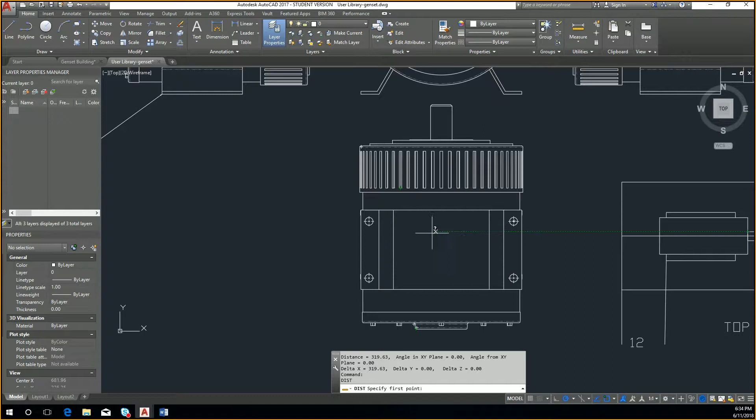So bringing in the models, sometimes they're unitless, so there's no definite way to know what units they are. This one happened to have it where it showed it was in millimeters, but you don't always have that available. So the quick check was you have to use a little bit of common sense, a little bit of logic. Check the distance. Is that 319 inches across, or is that 319 millimeters? So came to the conclusion that's in millimeters.

And going from there, created blocks. So I created a write block of just this because I need to know my hole distances. And then I needed my final view, which was going to be this one for the front view and this one for the top view.

So again, the command was W block. That lets you write a new block. Choose the folder I'm going to save this in. Where is it? There we go. So I'm going to just name this something simple. Genset top. Genset top view.

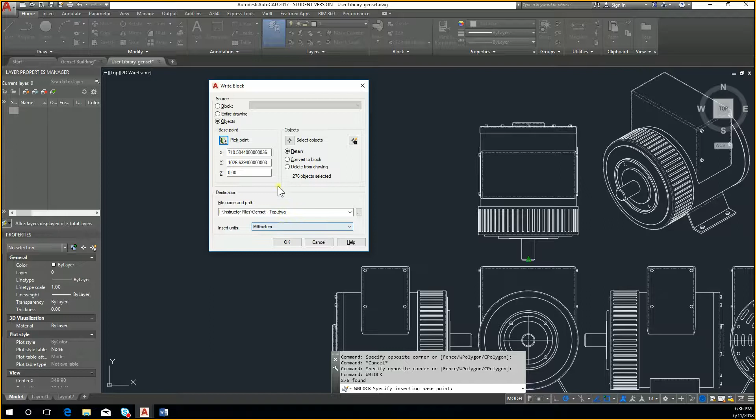And then previously I had started off with a couple different views already, so I have my bottom, my front, and my top. So I've already done that from last time. So I will jump back over to here. So as you see, I've already gone ahead and done a few of it, but I can just go back to show you what I had done before.

So bringing in the bottom, there's my bottom.

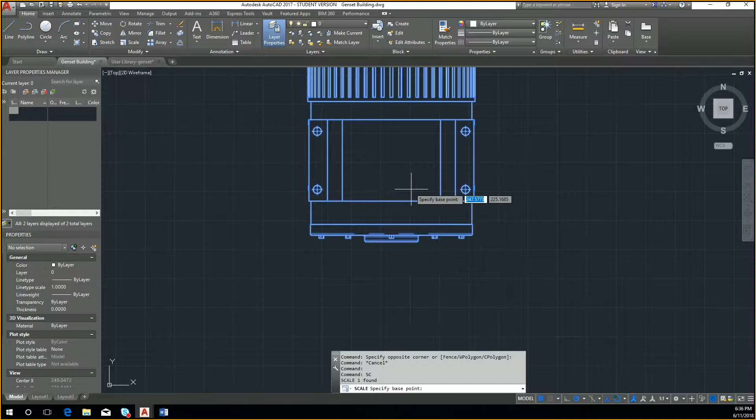This was something that I had already scaled. Had this not been scaled, it would be a lot larger, but the way to scale from millimeters to inches is using that 25.4 factor. So 1 divided by 25.4 gives me that scale factor I need to put in. I would punch that in after choosing a base point and scale it down. So I've already done that. This is now in an inch size.

So I can continue on with my project. From there, I'd mentioned we want to be mounting this onto a 3 foot by 6 foot by 3 foot tall table using 2 by 2 by quarter HSS around at the corners and on the horizontal plane of the frame.

So this is going to be 36. Sorry, other way around. This is going to be 72, 36, and there's my table. So I saw some of you guys taking measurements.

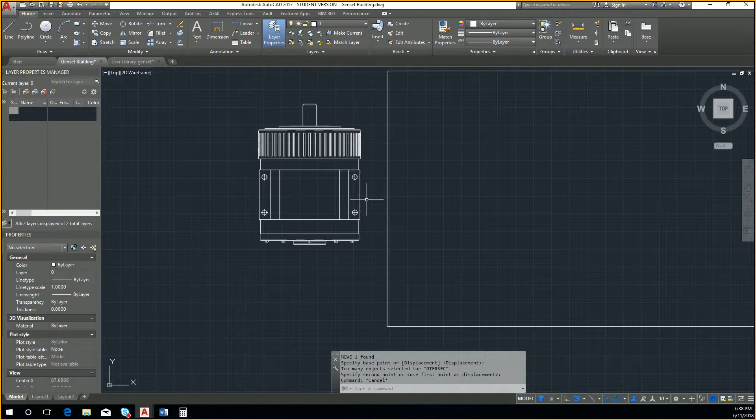That's one way to do this, to figure out your hole pattern. The other way you can actually do this is, since you already have the model, you don't have to do additional work. You can throw down a centerline for reference. Rotate this object so I have it in line like so.

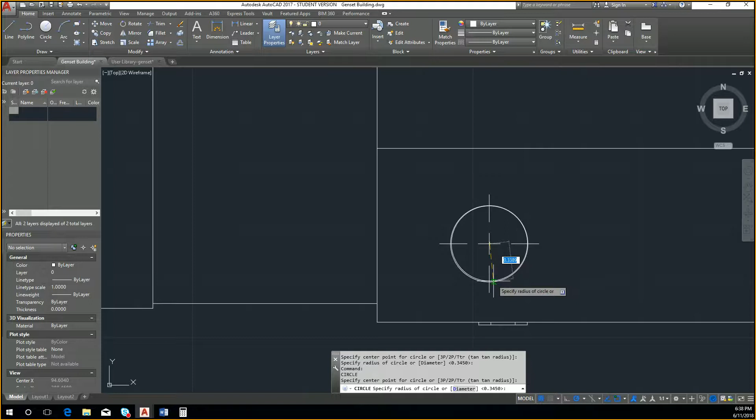And I'd said I'd want to put this 12 inches from the back, so there's my mount plate, 12 inches from the back of the table. I'm going to move this from my reference point now, 12 inches. That's done. I can then draw in my hole pattern, matching circle for circle, like so.

So there's the plate of my table. So isn't that a little bit easier than taking the measurements and trying to locate everything? Try to use the model to your advantage, because you can't get any more accurate than that. In real life, this would be something they call a match drill, essentially, by having your object directly onto what you need to be mounting onto. It's essentially perfect, right? There's not much closer you can get to this.

So once I have that, that's my top of my table. As you can see, did that previously. Just going to delete that one. And then I projected a view to show the front view of it.

The reason I did this is because later on, we're going to want to show thickness of this table. The only way to show thickness is you have to have multiple views so you can actually dimension it properly. And I did actually show this where my hole locations were. As you can see, they line right up with the holes above on a hidden line layer.

So that's the top of my table. I then proceeded to make the rest of my table. So now that I had this made, I could copy that over and put that into view of this. The reason why I have multiples now, because as I mentioned, you need to have multiple views of things dependent on what kind of component they are.

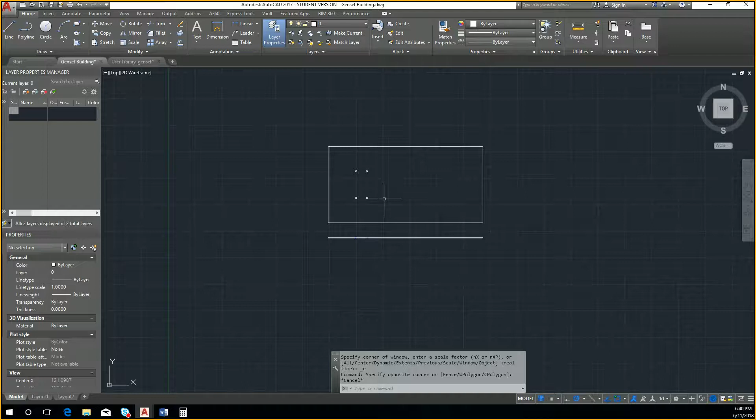So if you were to truly build this, this is a standalone piece. This is something you would actually send out to a shop to have that plate cut down to the right size, and they would actually mark those holes and drill them out, either by a machine or put onto a cutting surface. So a laser, a water jet, a plasma table, something that would actually cut those holes out for you. So multiple ways of doing it.

This is more the assembly side of things. So to actually get to the legs though, we have to actually build up that frame. So here's my frame.

So to figure out my height, I went back and checked, 3 foot tall. Overall height needs to be 36 inches minus the height of this HSS, so 2 inches there, leaving me 34 inches on the bottom. If you interpret this as taking the full height including the 1/4 inch, which is what I did, then this is actually just 35 3/4.

So to do this was literally just drawing out my lines for my vertical legs there, and across, and all the lines inside are just hidden lines of the internal hollow tube.

Finishing off my corners on a top view, I've mitered each of my corners. That's just a 45-degree line there, so in case we forgot how to do polar, I just did a 45. You can extend it past, you don't have to actually figure out the true distance of that.

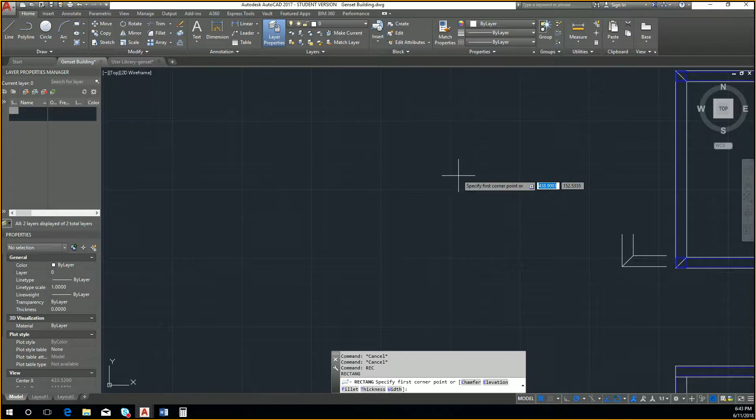Two by 2. There we go.

From there, we don't have perfect dimensions of the outside radius, but it's typically about a 1/4 inch. And then the wall thickness was 1/4 inch, so 0.25. Fillet again. Radius is about half, so 0.125.

Switch over my layer, hidden, and then that's my top-down view.

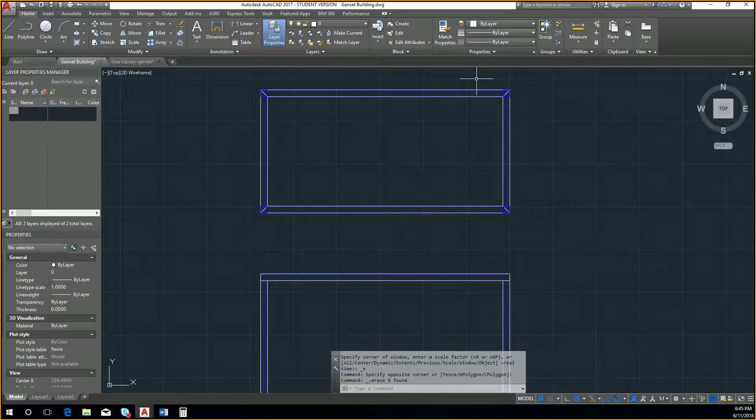So this is its own standalone drawing as well. I can add one more view if I want for the side view, like so.

Trim that back, and there we go. This is my side view.

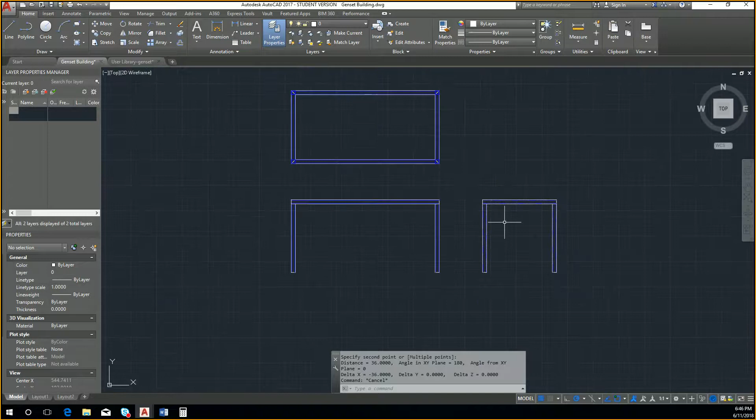So those are all the views you would need to build this specific table. Depending if you're required to do it, some companies will actually ask you to do an individual part drawing for each of the unique pieces of HSS.

So again, I would just copy out just that piece that I need, move that over, change that layer. And there you go, that would be my detail drawing of this piece here, just because these have miters on them, and then you'd repeat it for this piece here for your shorter lengths. And we'll get to showing that on the annotations a little bit later.

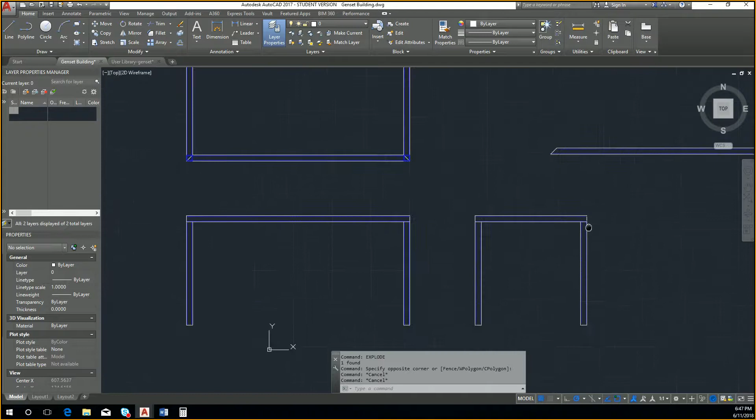So there's my table, here's my table fully assembled. As you notice, I've chosen to leave out hidden lines on my assembly of the table. That's just for clarity. There's times when you're going to need to choose whether to show all the detail, or certain times you can choose to actually hide away some detail just for clarity's sake, because the detail of the thickness of the tubes and everything else was already done on this component drawing, meaning your full assembly can be left a little cleaner.

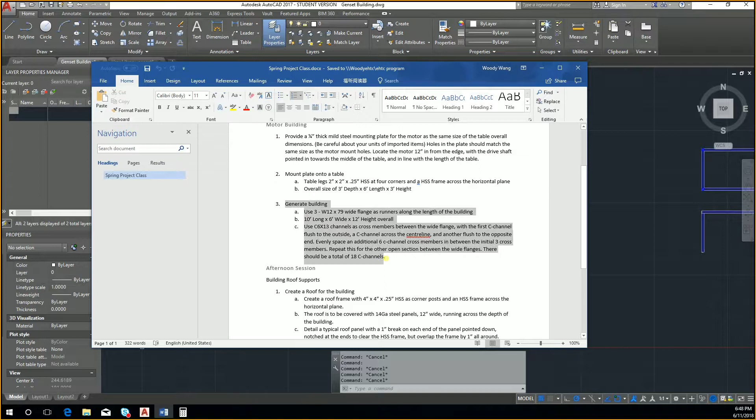All right, and moving on from that, that's my table. So, gonna jump onto generating the building itself. So we're gonna look for W12 by 79 wide flanges.

So W12 by 79 right here. As I mentioned last time, if you ever need to, there's a nice handy tool called Snipping Tool in Windows. If you start that up, it will actually let you just go ahead and snip whatever you're looking at.

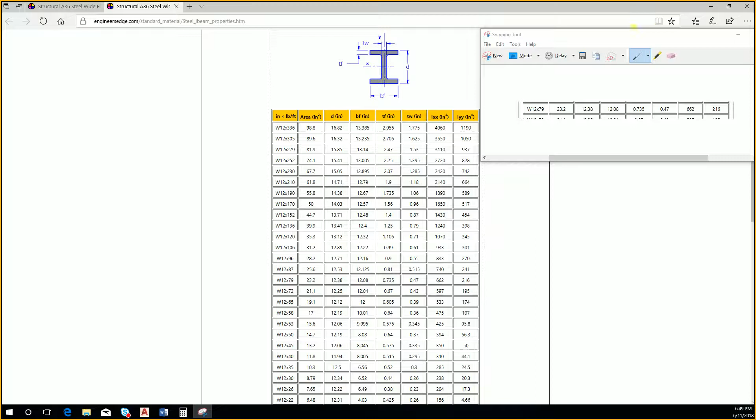And we'll go ahead and draw this up. So in case there was any confusion about how to read this, this is your steel callout, so this is the general name for this beam shape. After that, you follow through the rest of the columns. So area is not helpful for us right now, but the D is for our overall height, so 12.38.

So I can draw my vertical 12.38 construction line. After that, we're jumping over to our BF, which is our flange width here, 12.08.

Again, you can choose to do the math, or you can just punch everything in and let AutoCAD do it for you. And we've got TF, that's our thickness of the flanges here, 0.735.

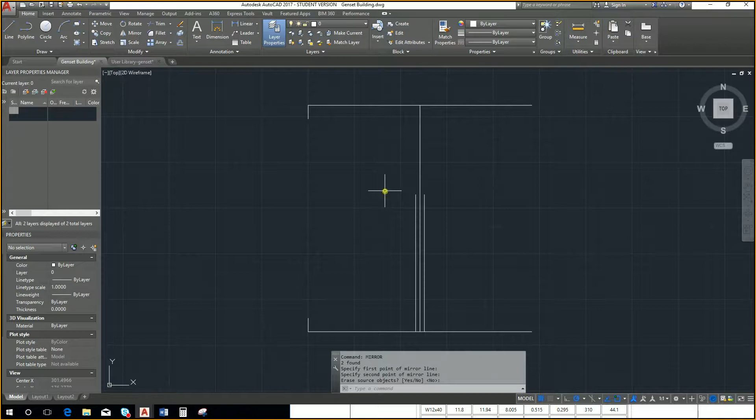I'm just going to mirror this right here. There's my midpoint. Like so. To my fillets.

Technically, let's do this now. Mirror all that. That's done. Actually, looks a little bit skinny. I'll make sure this is right.

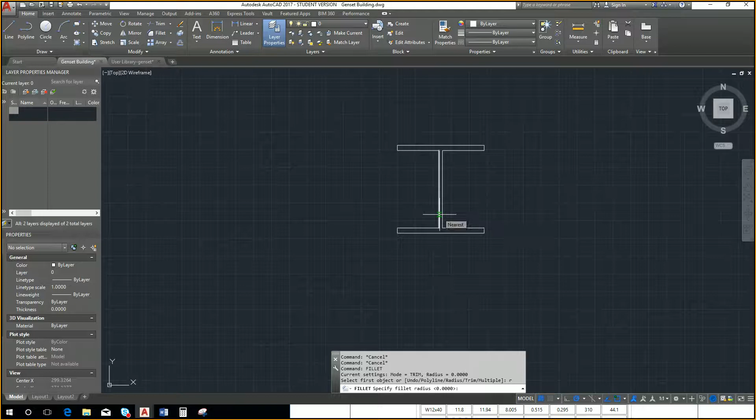Okay, that's good. And if you want to make it look a little bit cosmetically closer to what it should be, you can go ahead and radius those corners there.

And that's my wide flange. Can actually copy that and paste that as a block. That's not the most proper way to do it, but it'll work for now. You can actually create this as a proper write block if you are looking at building a library, but just for the exercise, just so we can go through this a little quicker, I'm just going to use that shortcut.

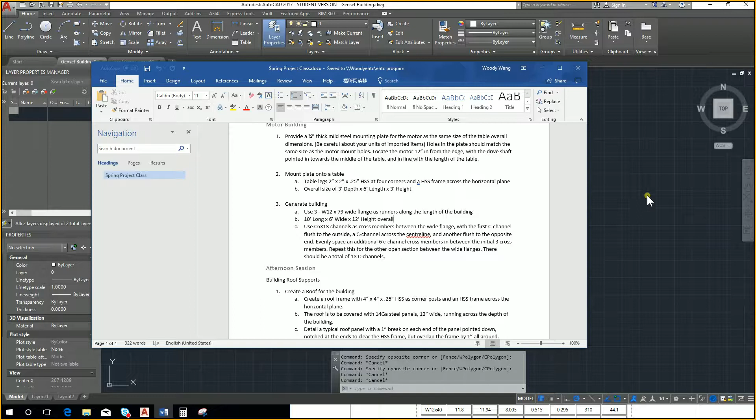So our building is 10 feet long, 6 feet wide, 12 foot high overall. So right now we're mainly just looking at the length and the width of our building. So 6 feet for width.

Construction line, 72 inches long. Gonna copy this object. I want that. Snap there. And I want one more based off the midpoint, like so. And there's my width of my building.

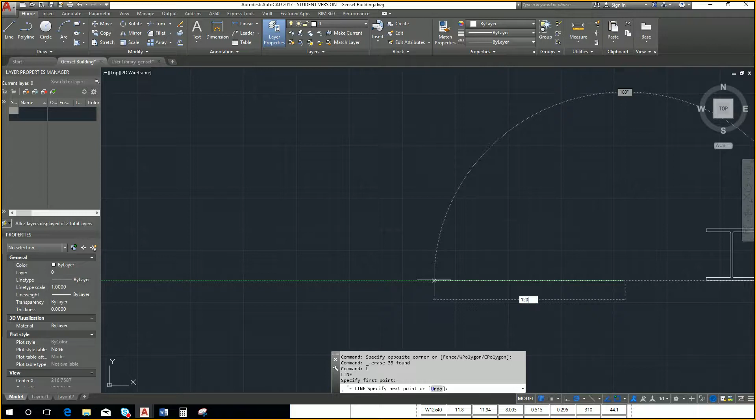All right, and then we're going to do a side profile of this. And notice I'm just using all the geometry already given to me. I'm not doing extra work.

There we go. So that's my side view. And we do need C channels, as I mentioned before.

Right here, we're going to look up C6 by 13. So C6 by 13. Right here, C6 by 13.

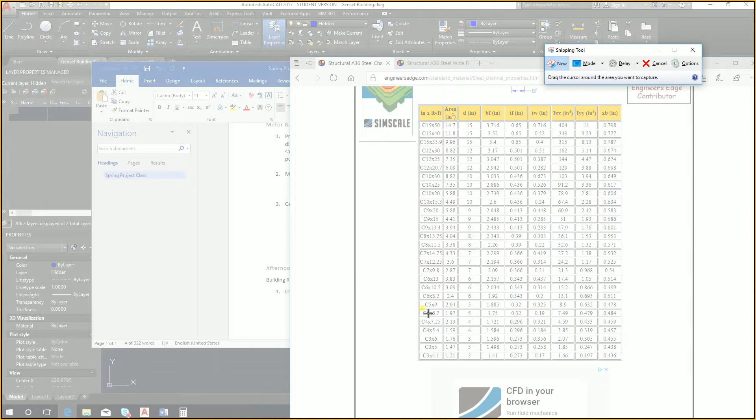So my overall height, my D, is going to be 6. Oops, wrong layer.

My BF is 2.157, right there in the bottom. So that's the base of the flange, right? So...

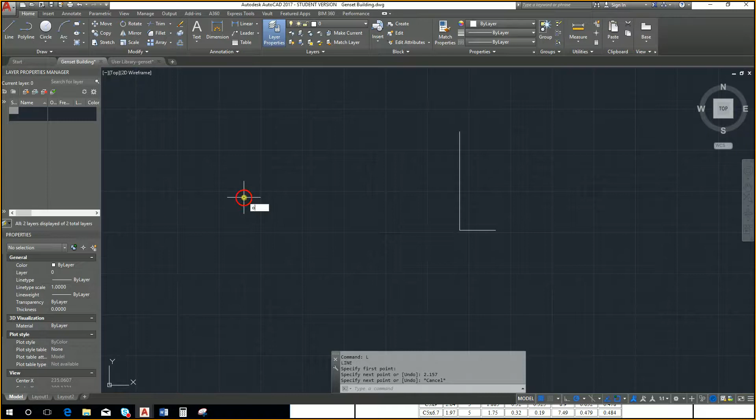My TF, my web thickness itself, is 0.343. And my T, oh sorry, I mixed it up. My TF is 0.343. That is the wrong piece. That should be this piece here.

There we go, my TW. My TW is 0.437. This is web thickness right here.

And that's everything I need.

So the thing that they don't truly show well is this curved out section here. The main thing is to get it looking fairly close. There are other sites that will actually show you that exact sizing, but just for our purposes, we don't need it that accurate.

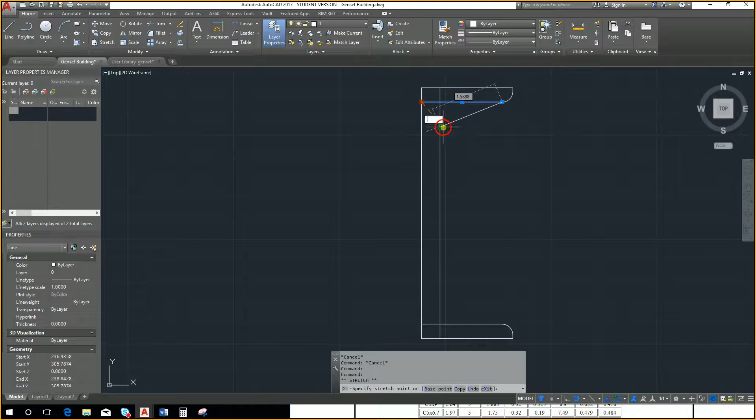So let's do a fillet. And we can make that 0.605. Oops.

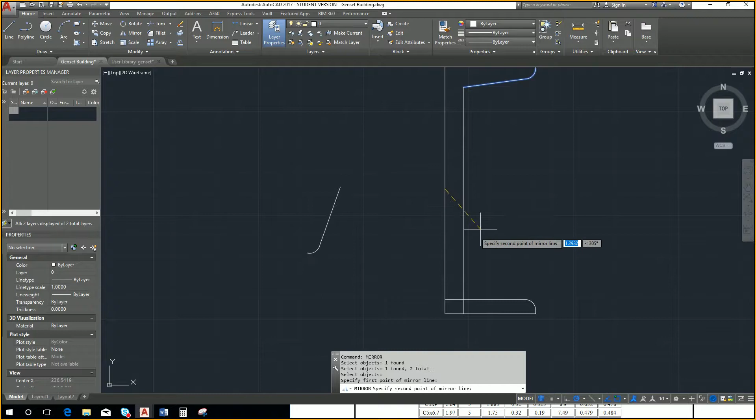Something like that. And there's my C channel, just like that.

So, just gonna use that shortcut for the block. Move this to the end, and as I mentioned here, we want the first one flush to the outside, one along the center line, and then the additional evenly spaced 6 on the one side.

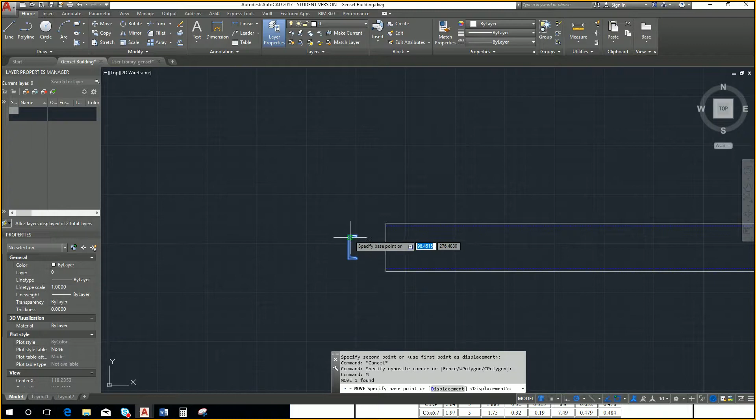So what that's going to look like is like so. It's actually hidden. One in the middle. One mirrored over there. And then this was where you had different options.

You can choose to either array, or you can use a lot of copy and finding midpoints between objects. So, just so you guys can see what the array one looks like, I'm going to array this object here.

I'm going to choose my path. It's going to be this path right here. And we're going to go with items. Oh, that's all right. Method. There we go. Measure.

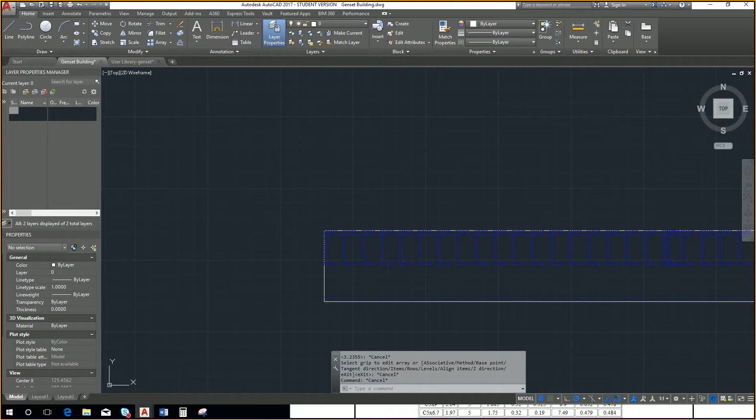So between those 2 points right here, it's my midpoint. So, copy that again.

Last one. So I've done all that. I can just go take these 3, mirror that again. Done. So that's how I would lay out the C channels.

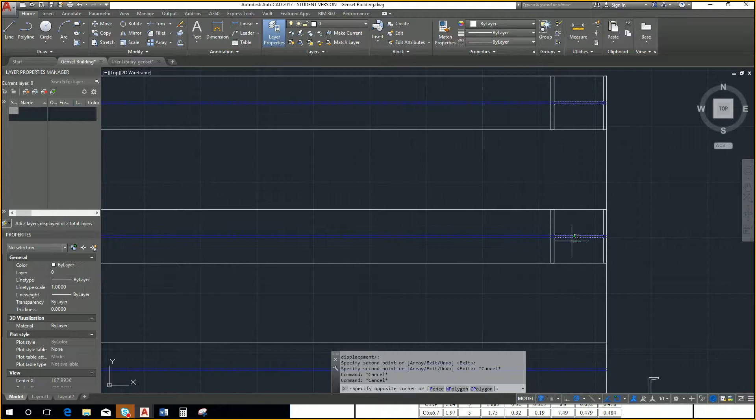And there's my top view. Copy this guy. Snap them down there so I can know. Actually, sorry, I should be copying all of them.

Do you guys notice the general trend though? I'm always trying to use the geometry I've already built and set up, so I'm not always having to measure things out or calculate things. Once I've already figured out one set of geometry, I'm trying to use that across my design as much as possible. So this method only works well if you're very careful and accurate with what you've laid out previously. You do have to be careful about that.

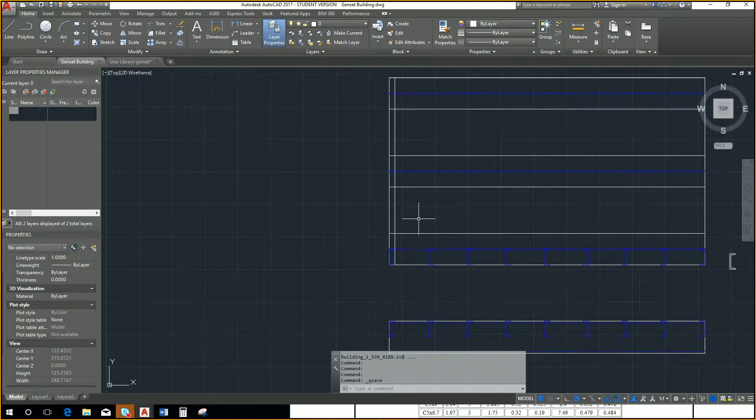So just do a copy now. I've got my distance set. Snap this to everything that should be visible. And one for the web if you want to be really accurate. Make that a hidden line.

Once you've done that once - actually I should take that back. Once I've done that once, I can go ahead and copy these to each one. I know those are a little bit backwards right now, but I'm going to fix that after.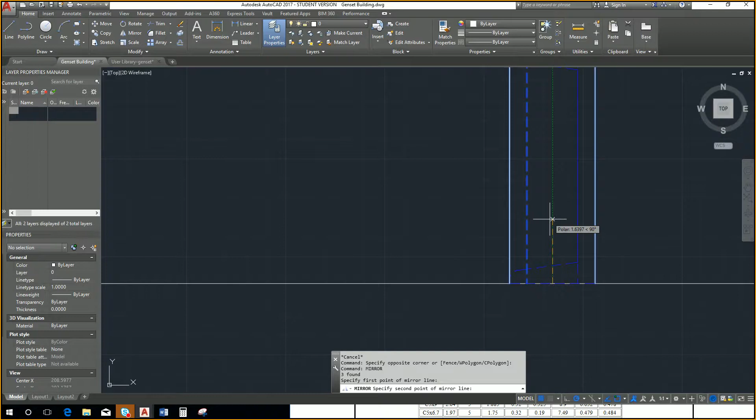My original reference C channels there. And then now, I think I mentioned it to some of you, but maybe you didn't all catch this - there's a break command. So you can either break these or you can trim them. I just want to show you how break works.

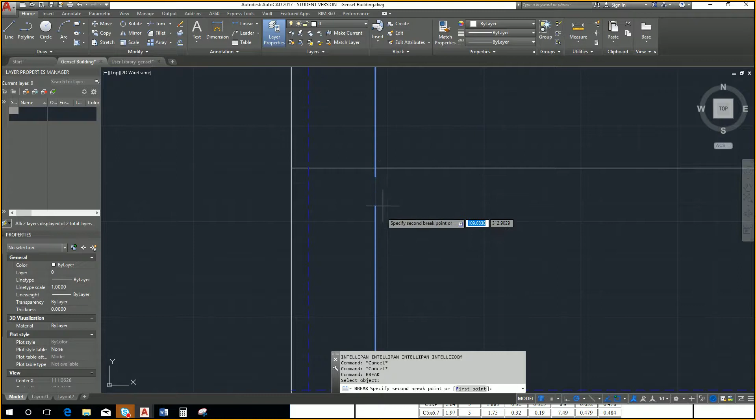Actually, I should do that over on this side here. So break - the first spot that you choose your line is the first part of your break point, as you can see. I want to break it on this side, and that's visible.

This is going to be broken there. So continue that on all the way through. Delete those.

Trim these back. And just in case you guys didn't know, trim command works where you can actually choose your trimming border and then use your multi-selection, so you can trim more lines at one shot.

So in this case, I can actually just use trim as well. Don't have to use break in that case. Where you would want to use break is in between here.

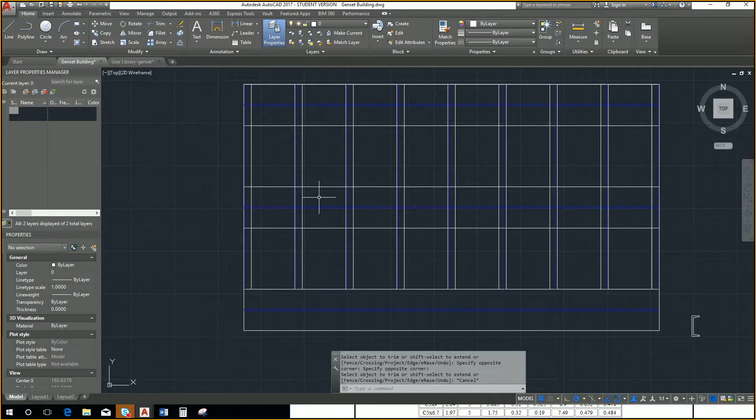Or, just to show you guys yet a different way to approach this, I can choose that line there to be my next trim point. Trim all these lines away.

And copy all of these from there to there. Oops, didn't get them all. Let's try that again.

Any questions so far? Does this make sense? Is this the way that you guys approached it, or did you guys do things a little differently? Do you guys like this method a little bit better?

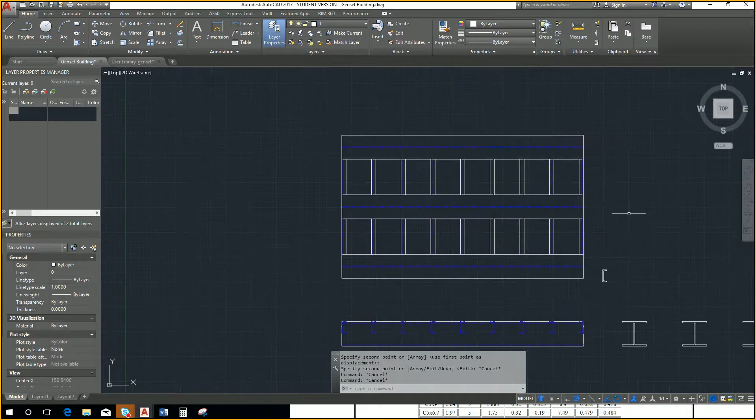So that's my top view done. So the one view that's missing, I need to finish up this one here.

So I know some of you guys were really confused about how to show your C channel, just because you weren't sure what's visible, what should be shown, and where.

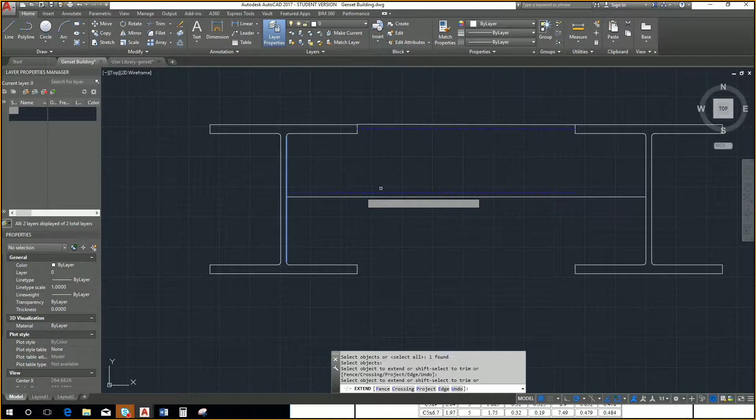All right, done that, copy that over.

And that part's done. So that would be one drawing I would leave alone, and then I would actually do a separate drawing over here with the finished plate. So this is gonna have, I believe I wrote down 1/4 inch plate. Where did I throw that down on?

Okay, maybe it was missing. There should have said 1/4 inch plate. Might delete it by accident. So 1/4 inch plate to top. Floor. So simple enough - 0.25.

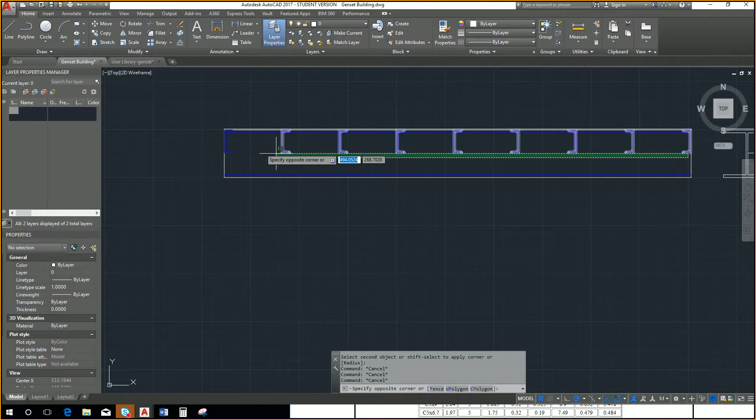So the other thing you can also do, is finish this off here. Yeah, actually a number of you guys got to the roof from what I remembered. So we'll just finish off this roof real quick here.

So 4x4 by 1/4 inch. My overall height is 6 feet - what are we looking at? Sorry, 12 feet. 12 feet overall height. So 144. So I'm just gonna grab another one of these frames, dump it over here.

The base, 144, just so that I have my height reference.

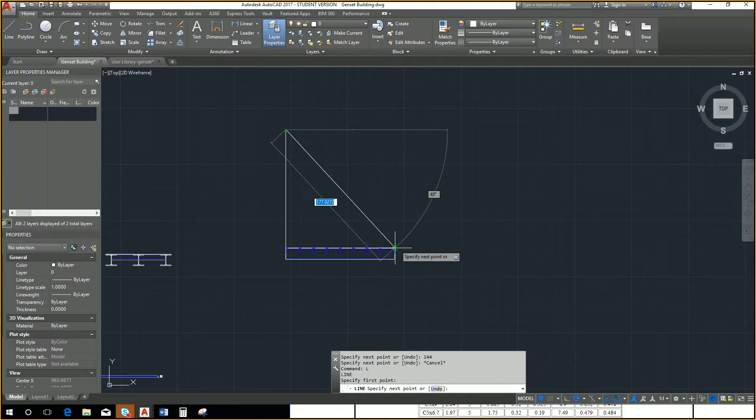That's everything, including my roof line, which I still have to build out, and that takes care of all of my base height. So from here, I can start drawing things out.

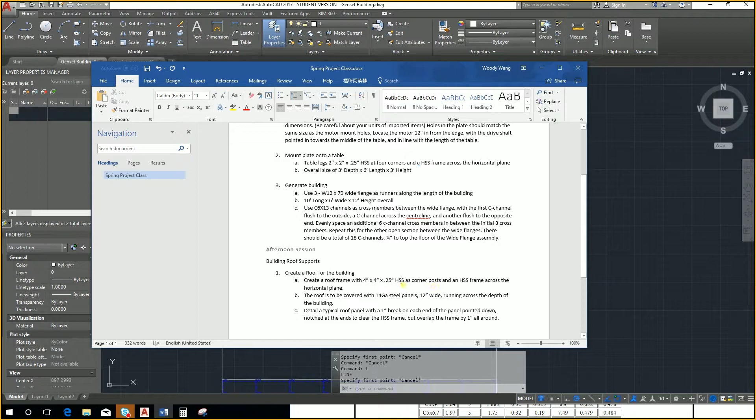We're going to use 4x4 HSS on this with 1/4 inch wall thickness. Just going to offset this top one by 4, drop that down. Posts are 4 as well, so that part's done. Trim these back, like so.

And then my wall thickness, if I want to show that. Oops, fix that one up later. Alright, there we go. There's my frame.

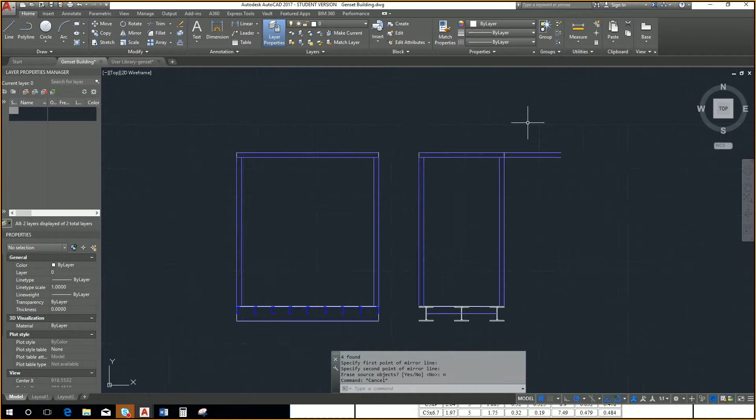And then to the front view, I'm just going to use this geometry again that I already have built up. I'm going to probably steal these posts here because I've already done them. Part's done.

Now if we want to do a top view, just show our miters, can do that.

This is where things might start to get a little bit messy. You may want to start choosing when to hide certain things, certain hidden lines. So maybe I won't need those on this part of the drawing, and maybe I don't want to show the hidden lines of my C channels.

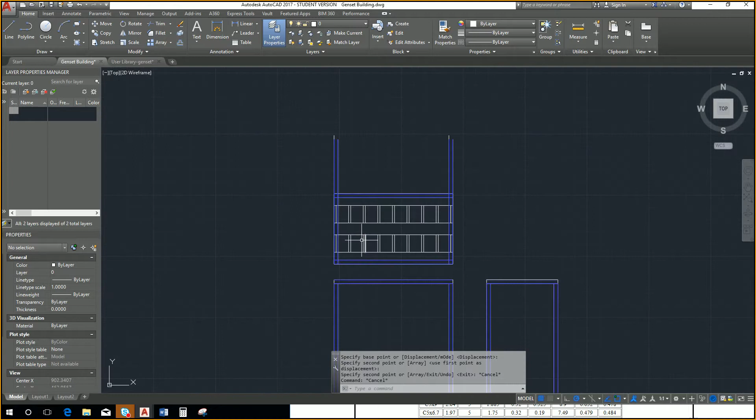Alright, so I'm going to make these all mitered, at 45s.

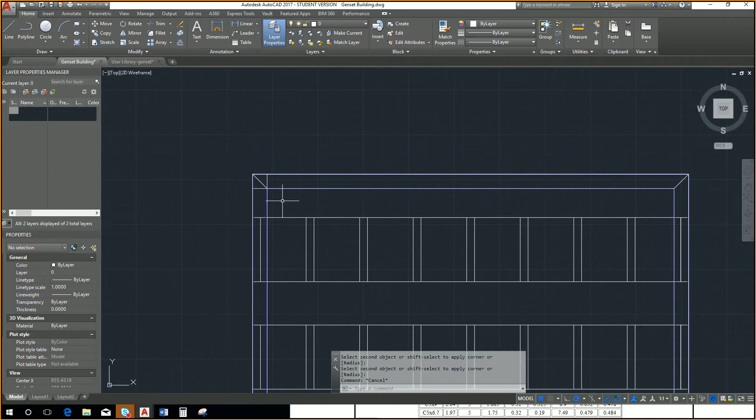Oh, that was the last ones. And there we go. So technically, since these are hidden away, you shouldn't really see these, so I can just delete those or make those hidden. And there we go, that's my roof frame structure.

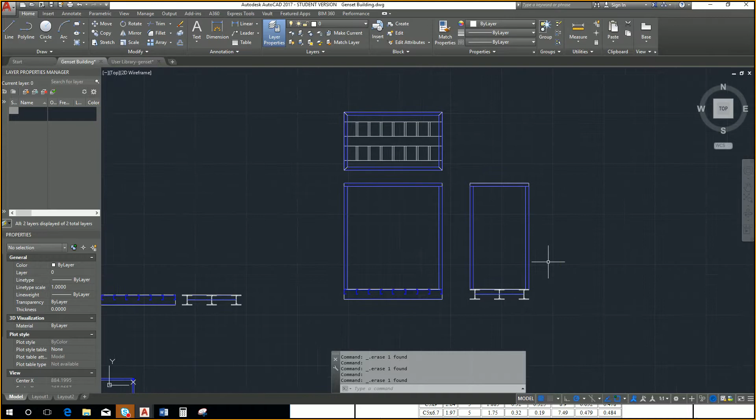Now if I want to show the roofing panels, as I mentioned to do last time, I can either make those all hidden or just delete them right out. And I mentioned they were going to be 12-inch panels with a 1-inch break down for each end, and they're going to be 0.0747 thickness, which is 14 gauge.

I'll just show you guys that. 14 gauge, so 14 GA is a shorthand for gauge, so 14 gauge steel thickness. Lots of different sites for this, let's just jump on this one here. Oh, maybe not. Let's go for the site here. There we go, 14 gauge, 0.0747 because we're looking at standard steel, not galvanized or aluminum.

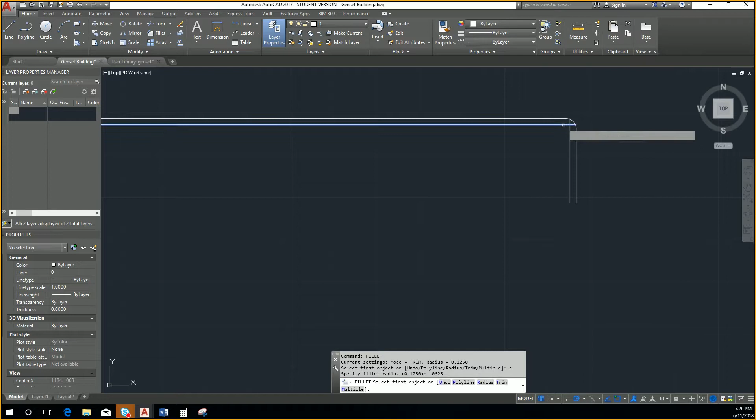So offset 0.0747. Offset that. That's a little bit... There's my roof panel.

Oh, I think I might have made this a little too big. Yeah. So, no worries. 12, and I showed you that nice stretch command last time. Stretch, take that base point, stretch it back, and everything fits.

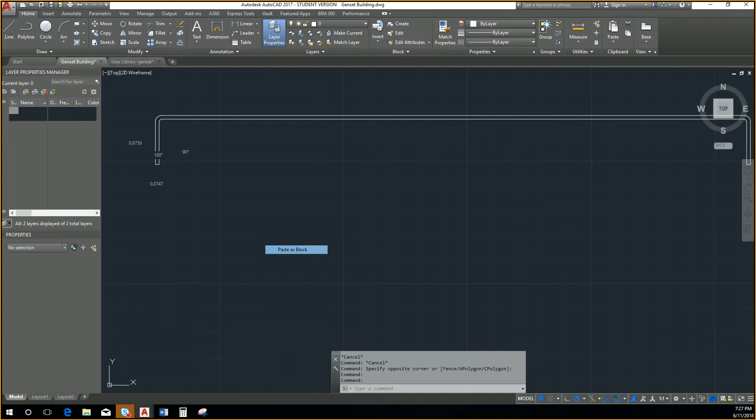So there's my piece. Just so you guys know that shortcut, again I don't recommend using this for proper design, but just for quick modeling, right click and drag while holding the right button of the mouse. Click out somewhere, and it'll bring you up this option, paste as a block.

As I mentioned, I want to have a 1-inch overlap. The edge here, so move that back 1 inch, and move that out 1 inch, like so.

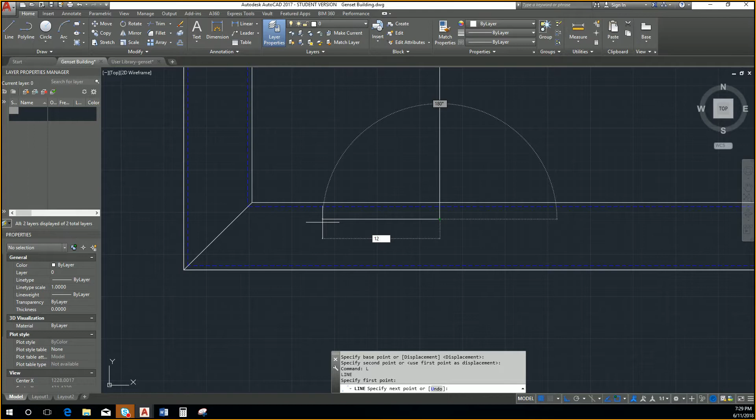Where's my error? And there's my panel.

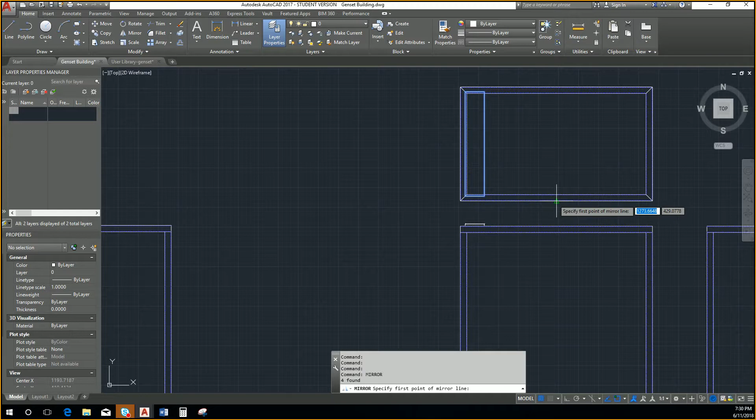So, actually, there's a few ways you can do this. You can either block that, you can array it, mirror this. Oops.

So at some point, one of these panels, if I remember right, will not actually match up quite right. So a few options here. Got that little sliver now. So depending on how you want to have this, you can either make an odd shape panel right in the middle, or you can actually have everything shifted over.

Where's my midpoint? Right there.

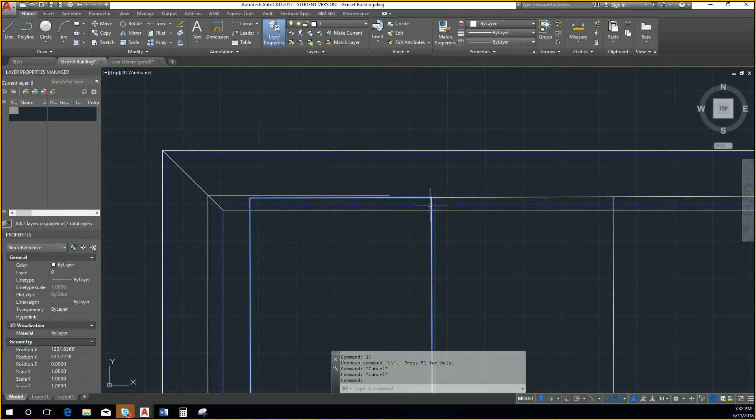Something's not looking right here. Something's a little bit off with my panels. That's all right, just doing this for demo. Oops. And there's my roof.

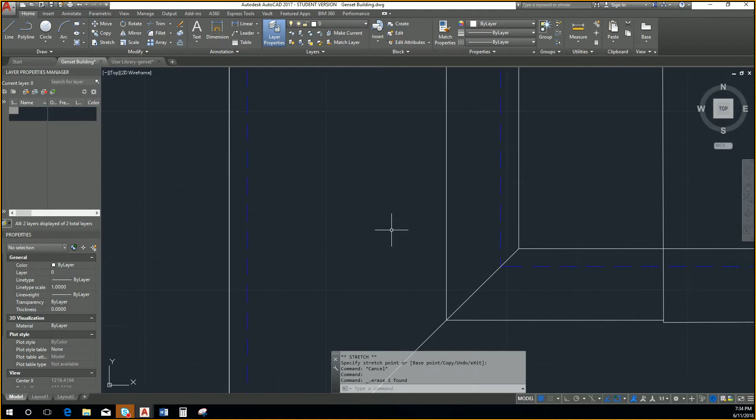So to make this accurate, this is where I have to do a little bit extra work now. So we can either make everything hidden like that, again this is the break command. Oh, that's looking really wonky, something went wrong here. There we go.

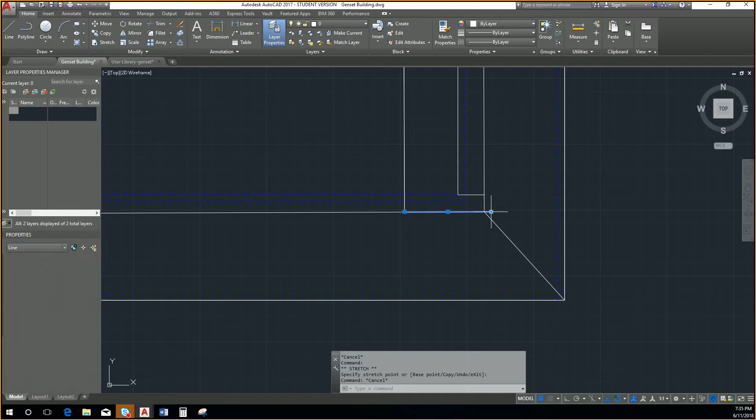Anyways, so you continue doing that, cleaning up all your different layers and lines, and we'll call that part done. Move this down, using this as my reference. That's my first start point. Like so.

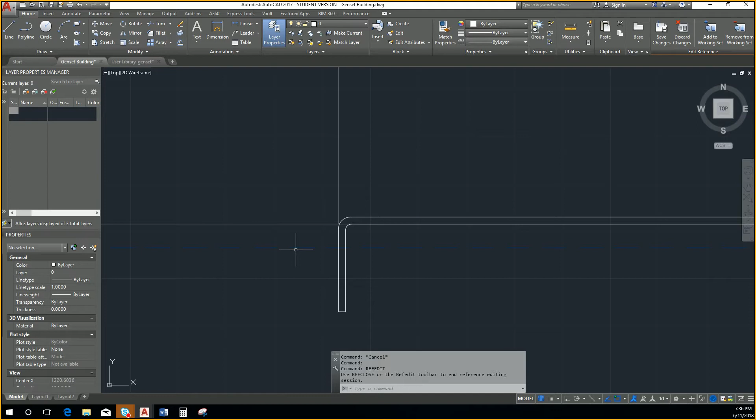And then you could actually technically break just this one model to show the bottom section right here to be hidden lines, and this visible, just to be truly accurate. So even though I did that quick paste command as a block, you can actually go and ref edit it still. It's still a true block, so it does have all the features available for you to do that. And since I've lined that up there, I'm just going to use a line there so I can break this.

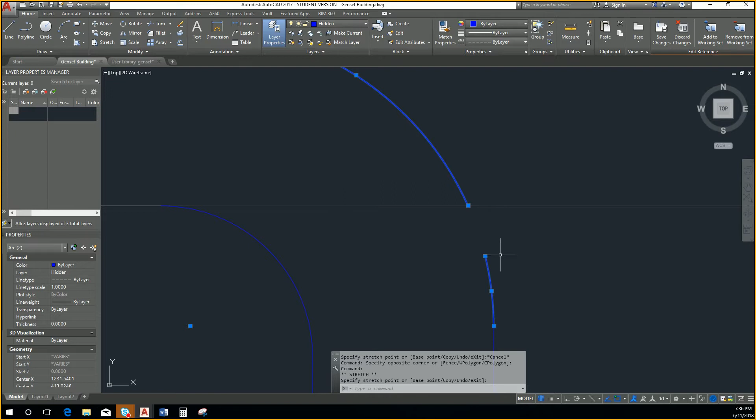Close. There you go. Copy that all the way through.

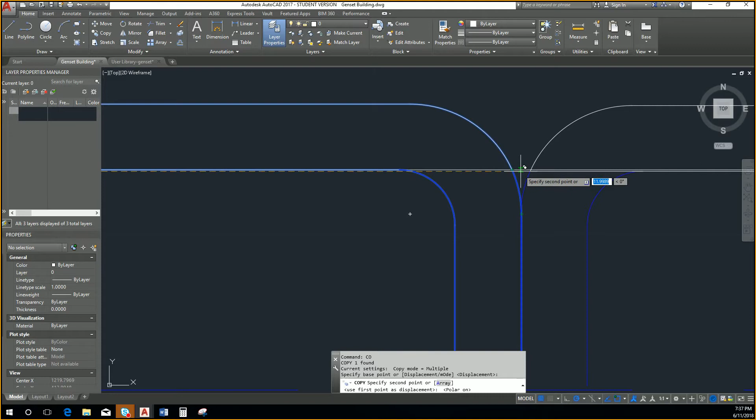And continue on. You can also array it, right? You know the size, you can also do the divide or measure method. So a few different ways to do that. And that's pretty much my whole building there.

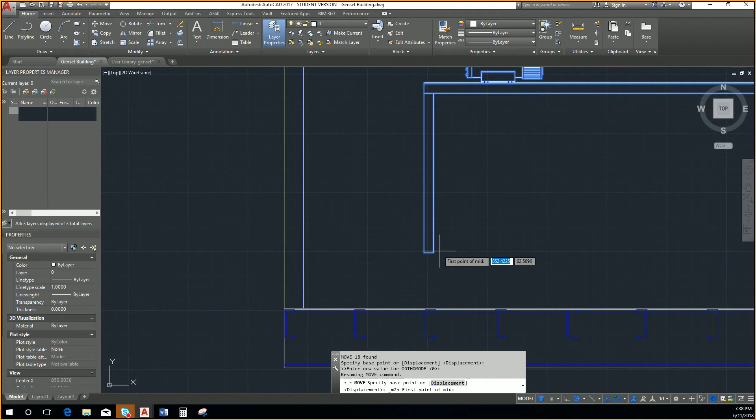And do one more copy of this, just so I can show positioning. The whole point of this. There we go.

So that was my approach at modeling this. Any questions? Does it make sense? Would this be faster, like some of those methods I approached this with? Do you think you guys would be able to use that during one of your designs?

Yeah, so I'll give you guys a little bit more time. Go ahead and do some drawings, right? Because I don't know if you guys got a chance to actually start building some viewports. So if you haven't done that already, try doing that. Build up viewports. You want to have pretty much as many models as I have, if not some more. There might be a couple more you still have to build up from here, just to show all the different locations. What I want you guys to do is to actually have a drawing for each major component.

And we'll go over detailing in the second half of the class, because we went through a little bit of it on our past exercise with the staircases, but this is actually a really good demonstration of an assembly that you have to properly detail with bill of materials and things like that. So try going ahead and doing that on your own for a little bit, and we'll go over it the second half. All right.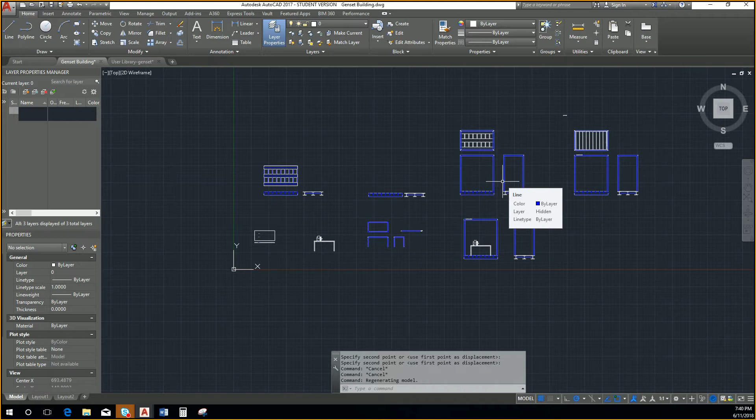Oh yeah, actually that's true. Sorry, yeah, there should have been. Should have gone to the web. That's very right, I forgot to keep those. Actually, I'll do it on this one. So, really good point. There should be extensions to this web here. No, only one side. Right there, only one side.

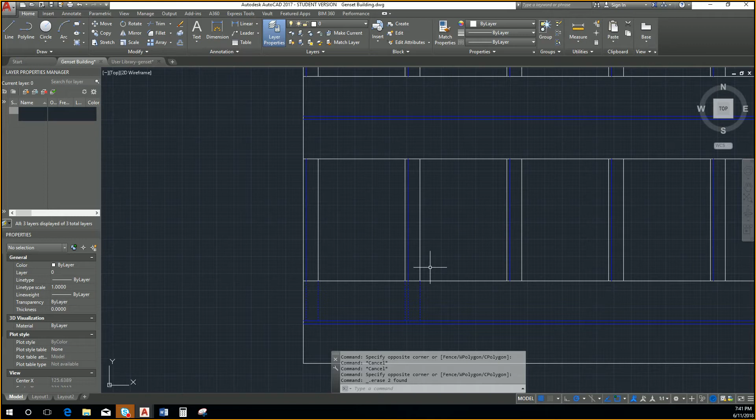Oops, missing a line. Only one side, another side is no. Only one side. You have the line only on one side. No, this can be a hidden line all the way through there, under the web. No, another one. Another one, that one's not there. Yes. No, that's right, because it's the web and then the two edges of the C, right?

No, you cannot see the web. You can see the web here, but this one has been cut. This one has been cut off. Only you can see here because it's been cut. Right, yeah, that is big. That's true, yeah, that's true. Yeah.

So, yeah, you're not really going to see that one because, but you're going to see the bottom. The bottom's still there, the bottom of the C is still there. Yeah, so those are very minor details. It's so important, right? You do want to show that it does extend. To actually properly show these copes, you'd actually have to get really, really detailed.

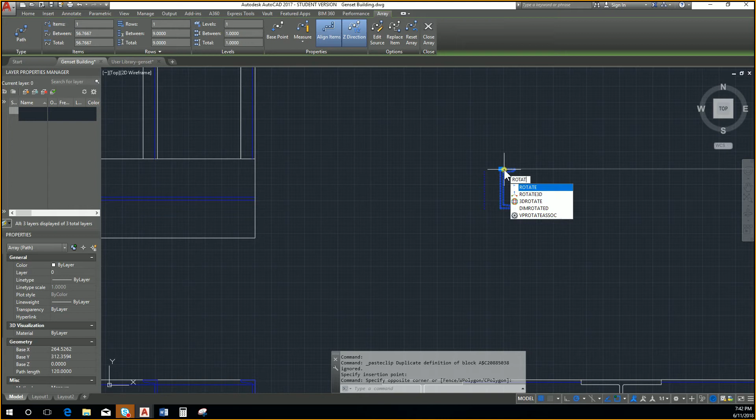So what you would need to do is get that distance. Grab my C. Let's see here. Sit down for this. Oh, it's over here. Take this down. Oops.

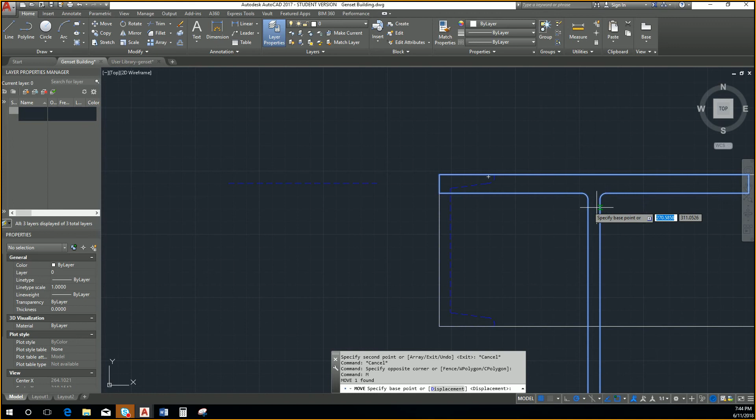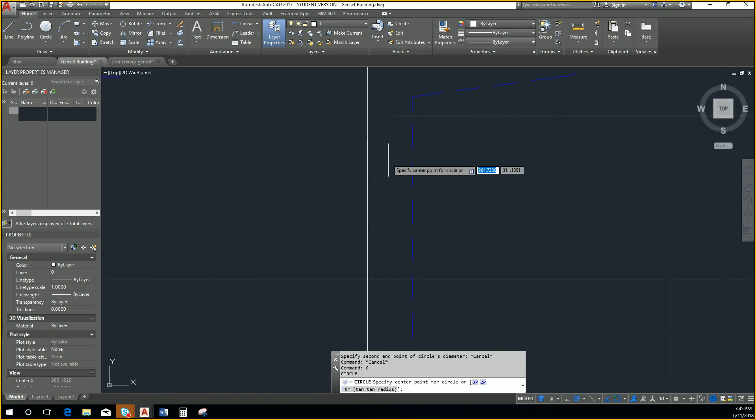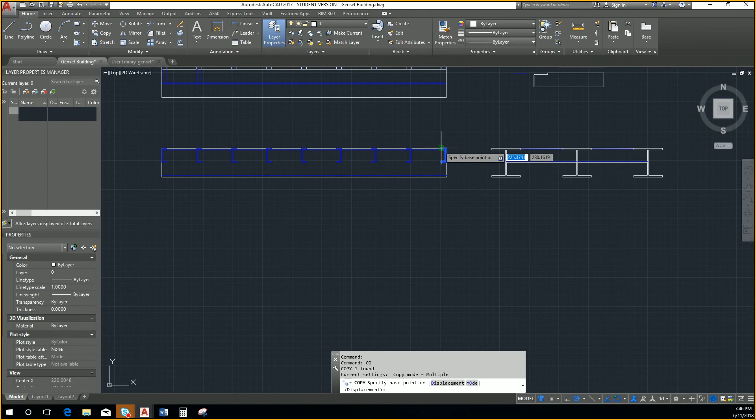Thickness of this. Like so. That. Actually, that'll work. Oops. There we go. And I should actually have one of these here.

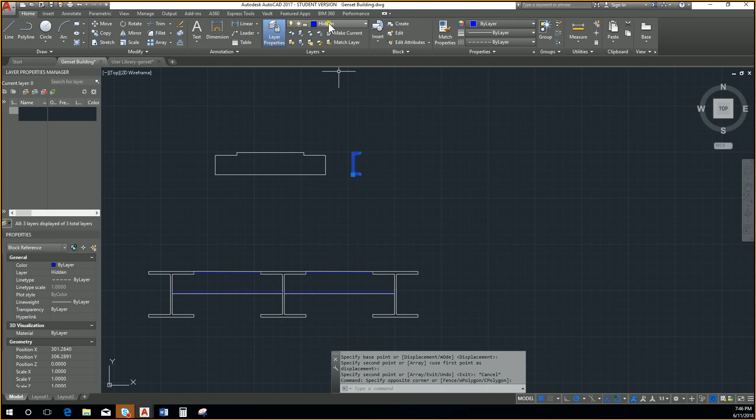There we go. So that'll be your detailed view of a C channel that's either notched or coped away. So that is being prepared to actually slide into these I-beams. Technically I did it down here too, but if you just had to draw it from scratch, that's the way you would do it. That's your piece.